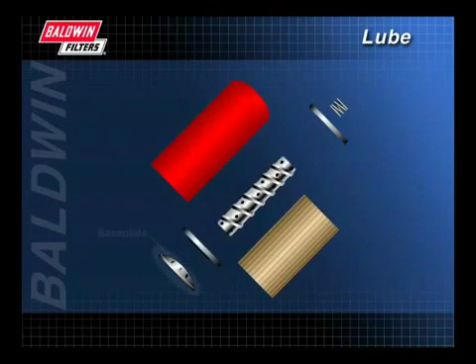The primary components are a base plate assembly, a bottom end cap, a center tube, the filter media, a top end cap, a compression spring, and the can.

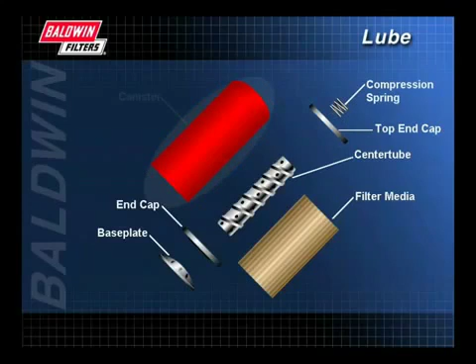Oil enters here, is filtered through the media, passes through the center tube, and into the engine.

The name bypass may be misleading. Partial flow is actually more descriptive. In a bypass system, about 10% of the oil flow is finely filtered and returned to the sump where it sweetens the dirty oil. It is a continual process in which all of the oil is filtered within minutes.

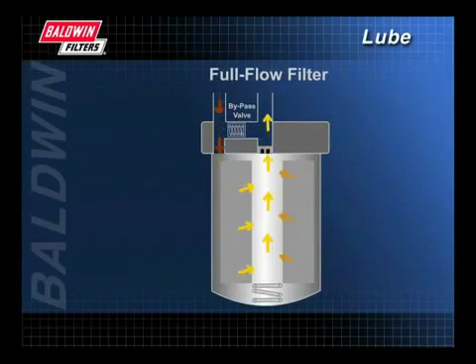With the full flow system, developed in the 1950s, 100% of the oil is filtered before it reaches the bearings. Therefore, the filter is less restrictive and more free-flowing than a bypass filter and should remove all particles large enough to cause immediate damage. If the system becomes too restrictive, the engine may not get enough oil.

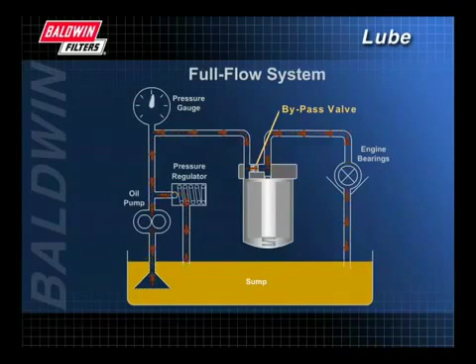Because it is better to get unfiltered oil rather than no oil at all, full-flow systems utilize bypass or safety valves that open under OEM-specified differential pressures. The bypass valve is located in either the system head or in the filter itself.

In the 1960s, the full flow and bypass systems were used together. This hybrid system offers benefits of both without some of their disadvantages. With this method, all oil is continuously filtered by the full flow filter before it reaches the engine's critical components.

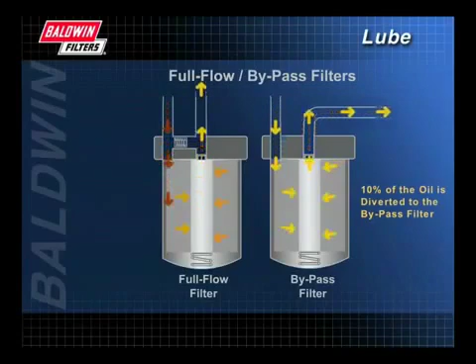About 10% of the oil is diverted to the bypass filter where it is scrubbed of fine contaminants. Oil from the bypass filter is returned to the sump. The use of a bypass filter will lengthen the service life of the full flow filter because the bypass filter removes additional contaminants that could plug the full flow filter.

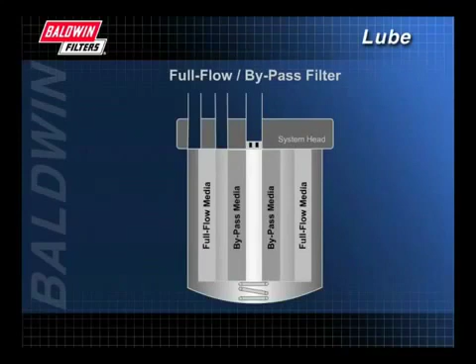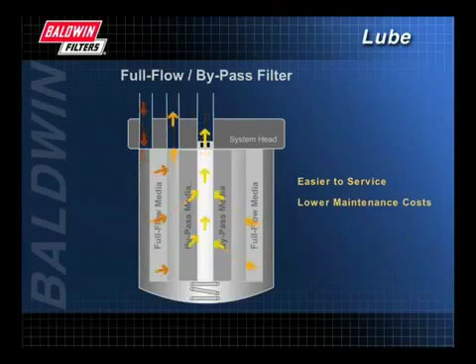A significant breakthrough in filter systems came in 1987 with the development of the combination full flow bypass filter. It combines both elements within one filter canister. It is easier to service than two individual filters and results in lower maintenance costs. Remember though, with the combination filter, there is usually less oil in the system and some decrease in contaminant capacity, which lessens the margin of safety.

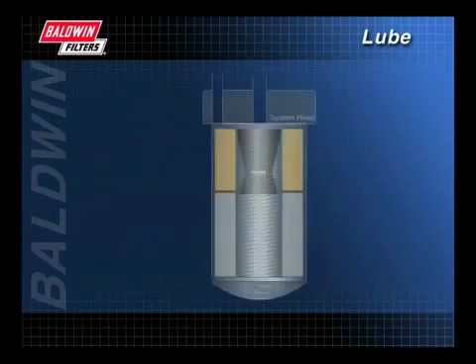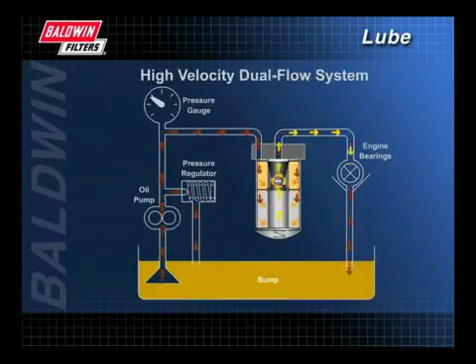Recently, Baldwin introduced its line of high-velocity, dual-flow spin-on filters. High-velocity filters have one inlet and one outlet. All oil flowing through the filter is sent directly to the engine to protect vital engine components, rather than a portion being returned to the sump as with conventional dual-flow filters.

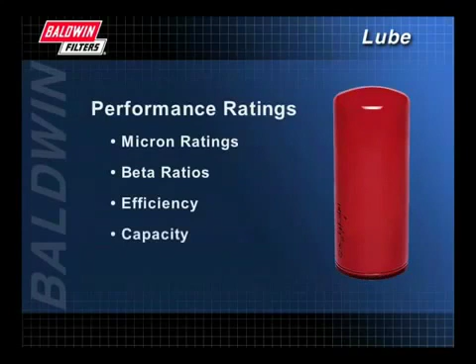When selecting a filter, it is important to note and understand performance ratings. Overall performance is expressed through micron ratings, beta ratios, efficiency, and capacity. A filter's micron rating is the measurement of the size of contaminant that can be efficiently captured by the filter.

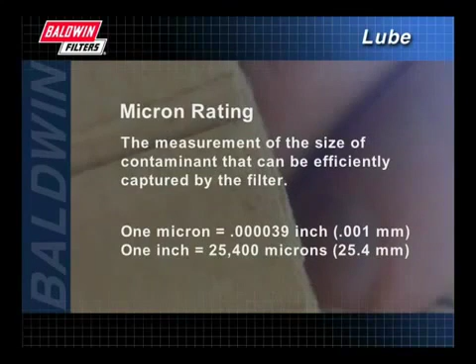Filters typically trap contaminants in the 5 to 20 micron range. While microscopic in size, these contaminants can cause extreme damage to the engine. Remember, something as small as a human hair is 50 microns.

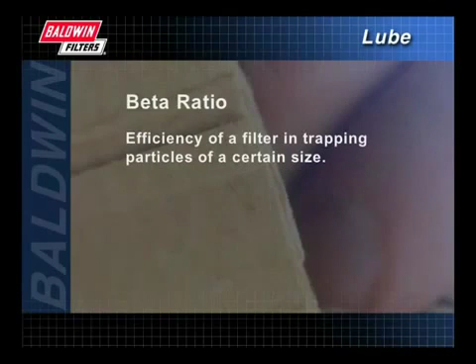Beta ratio describes how efficient a filter is in trapping particles of a certain size. A multi-pass test is used to count the number of particles of a given size before and after fluid passes through a filter. This information is converted into the beta ratio using this formula.

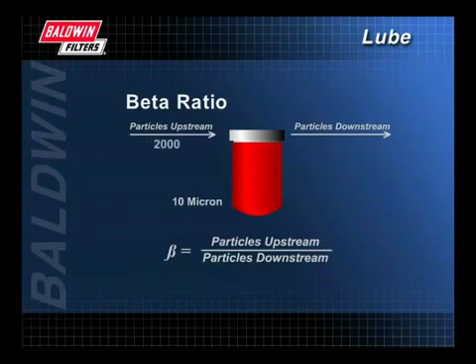In this example, at the 10 micron level, the number of particles upstream is 2,000. This number is divided by the number of particles downstream, which is 1,000. So at the 10 micron level, the beta ratio is 2.

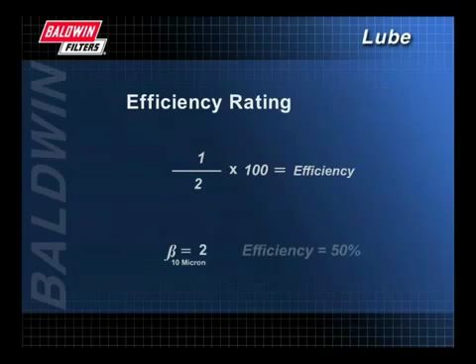Efficiency is then calculated by taking the beta ratio minus 1 divided by the beta ratio. This number is multiplied times 100. In this example, the efficiency is 50%. This is a nominal efficiency rating.

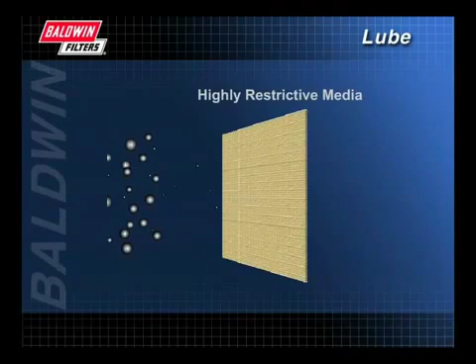Efficiency is largely determined by the filter media. Media that is more restrictive will filter out more and smaller particles, thus giving the filter higher efficiency. That same restrictive media, however, will lower the filter's capacity.

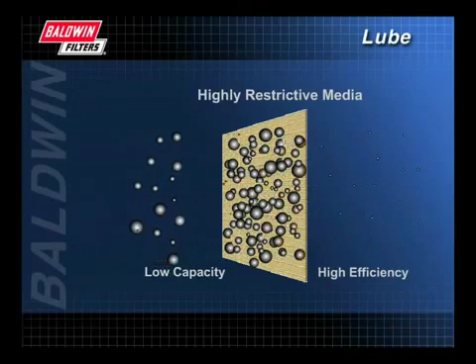Capacity is the amount of contaminants the filter media can hold before the pores begin to plug, interrupting proper oil flow through the filter. Highly restrictive media that increases efficiency allows less oil flow and, as a result, decreases capacity. So, as efficiency increases, capacity decreases. Therefore, a filter with high capacity will have less efficiency.

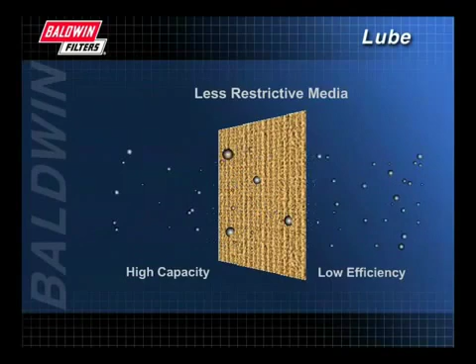Because of this, filters must be capable of removing the damaging particles while still allowing for proper oil flow. Understanding the correlation between capacity and efficiency is important when selecting the proper filter.

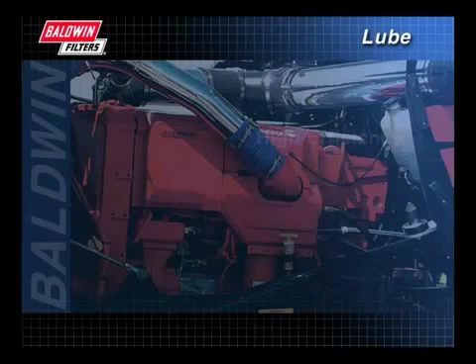A high efficiency rating with low capacity could result in frequent change intervals. On the other hand, high capacity with low efficiency may lead to engine failure because less of the damaging contaminants are captured. Often a middle ground between efficiency and capacity is the best place to be.

When comparing like products from different filter manufacturers, request comparative test results from standardized tests.